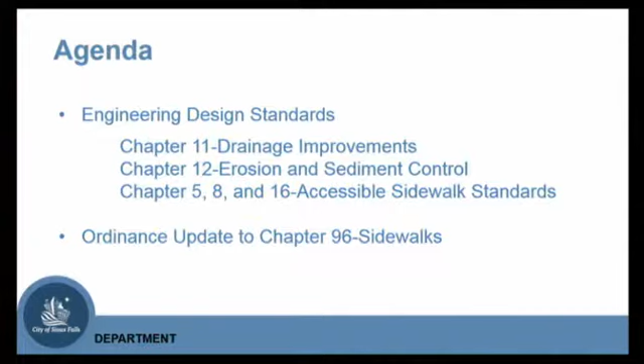I'm here today to give you an overview of our proposed changes to our engineering design standards, as well as a change to Chapter 96 of City Ordinance related to sidewalks. I want to introduce a few people: Lance Weatherly, our principal drainage engineer, will talk about Chapters 11 and 12 design standard changes. For my part, when I discuss accessible sidewalk standards and ordinances, I have Wes Phillips, our principal street engineer, and Colleen Moran, our assistant city attorney, to help with any questions.

One of the first things is why we're here to talk about engineering design standards. By city ordinance, the city council has to approve any changes we want to make to our engineering design standards. So that's why we're here today.

With that, I'm going to turn it over to Lance Weatherly to go through a few slides on his proposed design standard changes. After he's done, if you have any questions, you can ask him, and then I'll move into my part of the presentation.

Good afternoon, committee members. It's January 10th, and we're here to talk about drainage. It's single-digit temperatures out, but we always take the opportunity to improve our design standards. We did have a record rain event on Christmas Day not too long ago, and the system functioned fairly well, but we always look to improve, so that's why we're here today.

The first proposal is essentially a cleanup item. There were two locations in our design standards that had the same information, which could lead to potential conflicts. So in this proposed change to Chapter 11.8.9.5.e, we basically point to the other location. The picture shown is for reference, talking about a BMP, a stormwater treatment device, and the depth of water to treat.

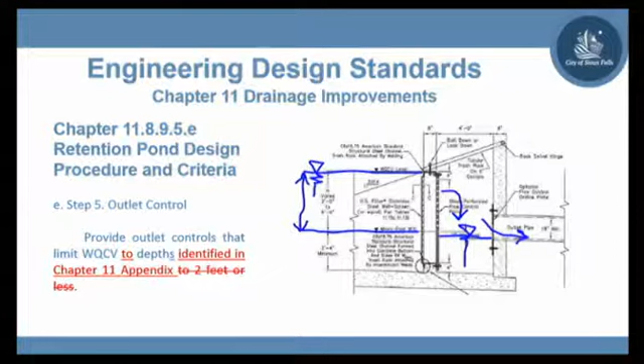Next, in Chapter 11, we're proposing to add design standard requirements for designing against erosion. The picture in the background shows a channel near Sertoma and Strabane Trail. Following the August 2015 rain event, there was some erosion there, as evident in the picture. To better clarify designs moving forward, we're proposing to input standard design requirements for certain channel designs to be better protected against erosion. This will maintain the channel's integrity and prevent sediment from polluting downstream, improving water quality.

The third proposal is related to the previous one. It's in Chapter 12, our erosion and sediment control, and relates to the size of rocks needed. Over time, we've noticed some smaller rocks, Class A, averaging about 12 inches depth, require more maintenance to go back and add more rocks. So we're proposing that designers can use that smaller rock size if accepted by the city engineer's office upon review. Otherwise, we're pushing them toward a larger rock to improve erosion control for outlet protection of that pipe.

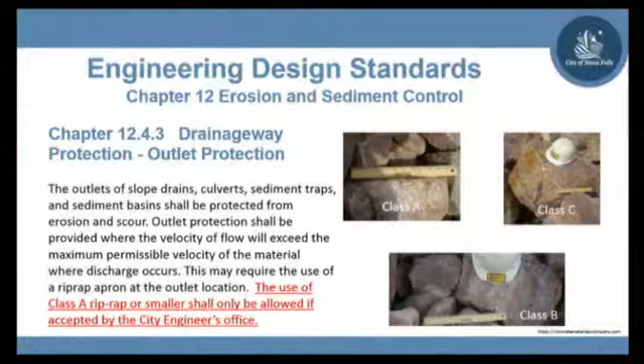Can you hear me okay? Yes. Are we talking about private access ways or public? These design standards would apply to both public and private. Well, I see the example you gave us over by Sertoma there. That was the city's taking care of that, right? That is a city drainage way, yes. So give me an example of a time when a private person would be handling waterways.

Most of these larger drainage ways, the city generally takes dedication of. An example of a private drainage way would be in a development where a developer doesn't want to give up control over that drainage way. One location out in Cherry Lake Reserve has a few spots they want to maintain themselves within their HOA. So this design requirement would apply to both public and private locations.

So right now, is the size of rock you can use being mandated on these things, or are you saying moving forward you're going to mandate it yourselves? It is right now. We are planning to improve that design requirement now.

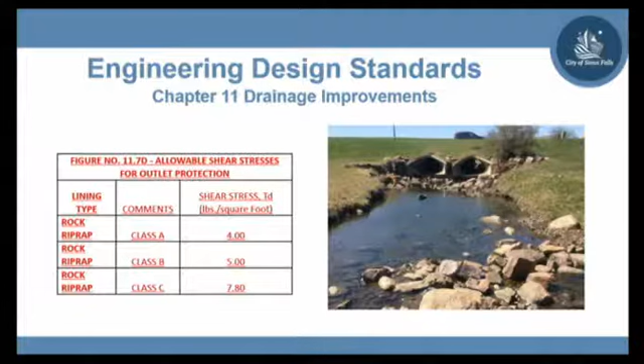Any other questions? Councilor Stehly? So this isn't going to be any added cost by requiring bigger rocks - it's just a housekeeping issue? Bigger rocks tend to cost a small amount more. It's a very small incremental cost, but if we're talking about a semi-truckload of riprap, we're probably talking on the order of $40 to $50 of potential additional cost.

Okay, thanks. Just a follow-up question - is it safe to assume there could be a savings in the long run, because if you're replacing riprap that's been washed downstream, you're just repeating the work? Thanks for bringing that up, Councilor. Yes, there would likely be a benefit with potentially less maintenance required.

Okay, seeing no further questions on this section, we're ready to proceed to the next. Thank you very much, good job. Thank you.

So, accessible sidewalks - a little background here. Everything we're doing is building on the Americans with Disabilities Act, which was passed in 1990 at the federal level. New construction and alterations in the public right-of-way must comply with the federal requirements, and the city is responsible for ensuring those requirements are met within the right-of-way we manage. So what we're doing today is making sure we're staying current with the most current federal requirements out there.

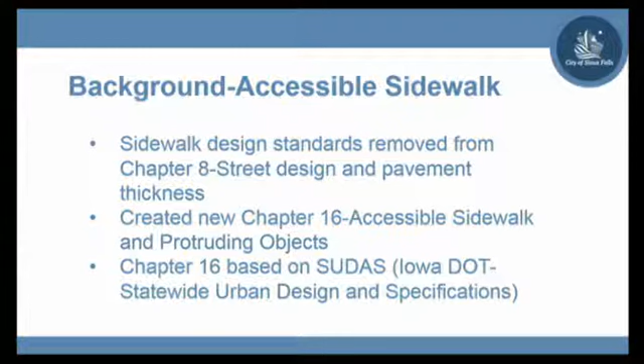It's the Iowa Statewide Urban Design and Specification Manual. This is a manual that the Iowa DOT, in partnership with a good majority of the communities in Iowa, uses as their basis of design. Rather than reinvent the wheel, we decided to use a document that's already been well vetted, so the majority of our document mimics the SUDAS document—it's just been tailored to Sioux Falls specific needs.

From an overall standpoint, this PROWAG document, this federal document, is about 112 pages long. What SUDAS and what we've done is put it into a more user-friendly document—just a little over 20 pages—trying to take federal bureaucracy and consolidate it into something usable.

Again, the vast majority of this is just formalizing our current standards and practices—putting into writing how we've been doing business. There are some new sections I'm going to point out as we move through here, or some things that are a little different than how we've done business.

But a lot of this goes back to the Americans with Disabilities Act of 1990, which is 10, 20, 25, darn near 30 years ago. When you start talking about landing areas and ramp slopes, those are all requirements that have been around for a long number of years—we're not just making up new regulations for that.

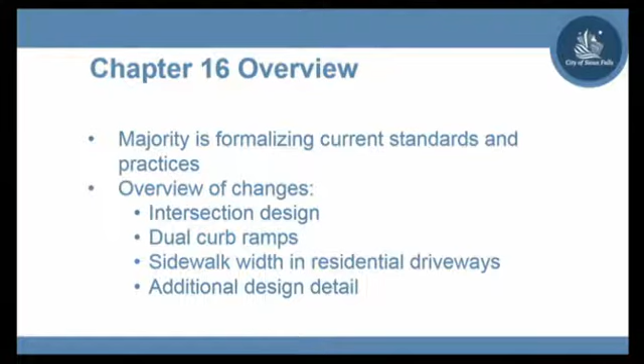Some of the things that are a little different from how we've been doing business: intersection design and how we're looking at that, dual curb ramps instead of single curb ramps, and sidewalk width in residential driveways, plus some additional design detail we need.

So just an overview of a typical design—a lot of what we're going to talk about is curb ramp design. That's really a foundational component of accessible sidewalks, making sure we have curb ramps that are accessible both for the mobility impaired individual as well as the visually impaired person.

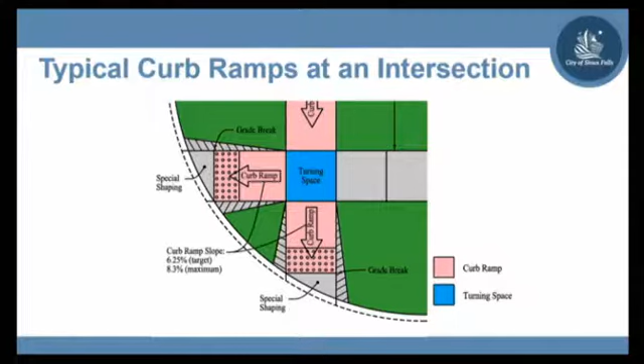One thing that PROWAG does require, though, that we're moving toward is dual ramp design. The previous slide as well as this slide show two curb ramps—one parallel with the sidewalk direction. Previously, curb ramp design had people get to that landing area and then go out into the middle of the intersection. We want to move toward dual ramps because it's less movement for the mobility impaired person.

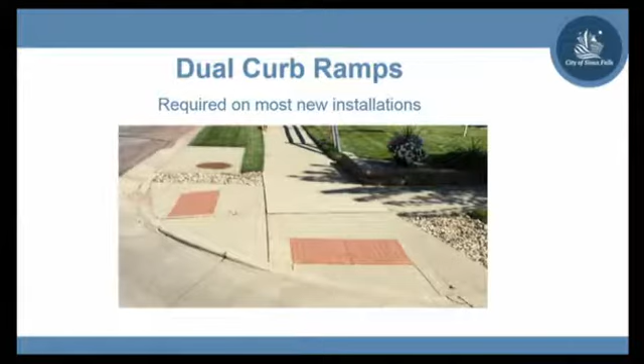They don't have to come to this landing area, go to the middle of the street, and then turn back to get lined up. That way we're basically going straight across. So in general, we're moving toward dual ramps. There are exceptions where on retrofits single ramps may be needed, or at some of our large intersections it's just tough to put dual ramps in there, but foundationally, we're moving toward dual ramps.

Another thing is the intersection design. We've always done a good job meeting ADA, getting people up to the street, but the new PROWAG requirements put a lot more emphasis on making sure we're factoring in our disabled community as they're crossing the street. So now there are requirements shown in the blue shaded areas on the slide. We have to make sure we're meeting certain cross slopes so the street isn't too steep as they're going across it. If it's too steep, it naturally tends to pull someone in a wheelchair to one side or the other. Depending on the type of street, there are different maximums. In general, our current street design guidelines comply with this, with just a few little tweaks.

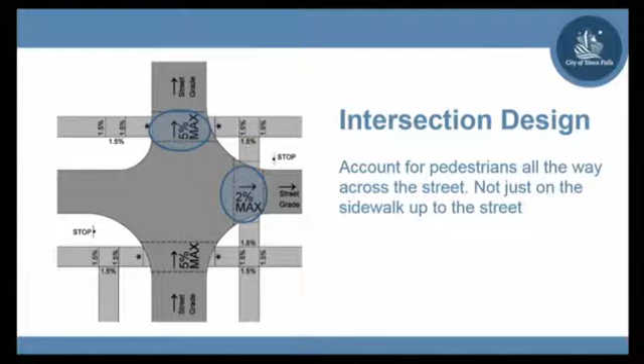This is one I want to emphasize. One of the requirements of PROWAG and the federal requirements out there is we have to have passing zones on the sidewalk if your sidewalk is less than 5 feet wide. So what that means is if two wheelchairs are meeting, the sidewalk has to be wide enough to allow them to pass. What the federal requirements say is you can have a 4-foot sidewalk, which is what we have on most of our residential streets, but when you do that, every 200 feet you have to have a passing zone.

So one of the things we worked through with the home builders was, one of the options we considered was should we just make all our sidewalks 5 feet wide? That would potentially increase cost, but then we'd be fully compliant everywhere. Residential sidewalks in general are 4 feet wide. If it's a collector type street with a little more volume, those are 5 feet wide, so they'd meet this requirement anyway. The majority of our arterial street sidewalks are 5 to 6 feet wide, so they all meet that. So really our discussion point here is on the local residential streets where our sidewalk is 4 feet.

So there are three options here. Again, one, we could have gone to 5-foot sidewalks, which wasn't received very favorably by the Home Builders Association. The other options were to actually build these passing zones like the illustration shows - every 200 feet, widen your sidewalk out to 5 feet for 5 feet in length, and that would meet it. Or, the standard we settled on, make your sidewalk through your driveway 5 feet wide. We typically have driveways less than 200 feet, and if your sidewalk through that driveway is 5 feet wide, with a certain slope it has to meet, we'd be in compliance. So that was the direction we moved toward.

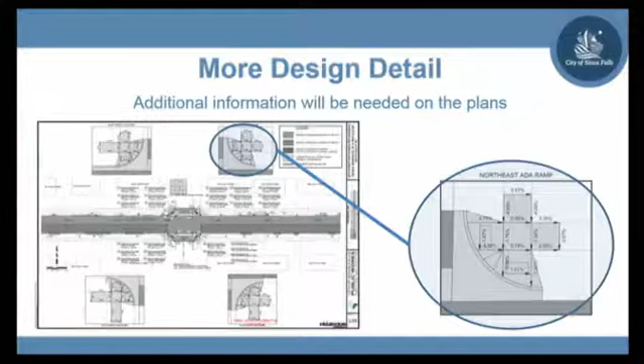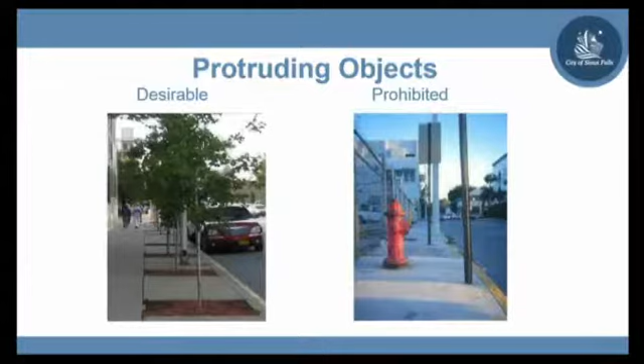The other thing that we're proposing is updates to Chapter 96, our sidewalk ordinance. I can kind of summarize that in 3 different areas.

First of all, clarify the inspection requirements. Now, to meet our obligation of making sure that sidewalks installed in the right-of-way meet federal guidelines, we have to inspect all the sidewalks that are installed, specifically with new homes. So previously, if a homeowner, when they're building a house, installed the sidewalk on their street frontage, we had not been doing those inspections. We now have to start doing those inspections to make sure those sidewalks meet the guidelines.

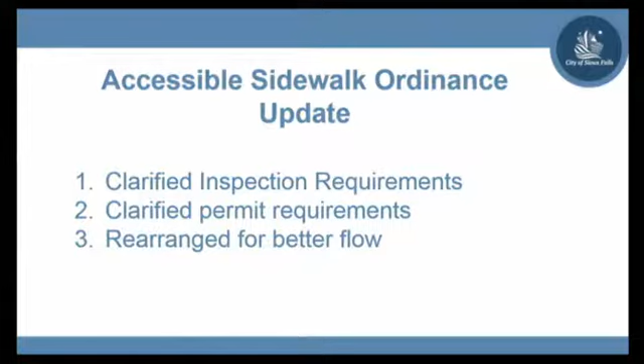In this case, 2% cross slope. That's one of the foundational elements of a sidewalk, meaning the slope can't exceed 2% cross slope. If it's too steep, naturally a disabled person can't navigate that very well. That's a foundational element of the Americans with Disabilities Act, so we're just going out there making sure they comply with it. It's a fairly strict standard, but it's something we have to enforce.

The other thing is clarified permit requirements. The way the existing ordinance is written, it basically says anybody doing sidewalk or driveways in the public right-of-way has to get a sidewalk or driveway permit from the city engineer's office. Well, the vast majority of our sidewalks and driveways in the city are installed as part of a building permit, and that wasn't clarified there. So what we've done is said, if you pull a building permit, you don't have to get a separate engineering sidewalk and driveway permit—that's included as part of the building permit. It's more or less a clarification of how we've been doing business.

And then we rearranged it for better flow—the flow of the permits, who's in charge, the specifications—we're just moving the sections around for better flow there.

So with that, I'd love to entertain any questions. Okay, great. Thank you, Shannon. Questions? Councilor Neitzert.

We're not changing the fee. Wes? $15? I believe it's $15, but I'd like to clarify that.

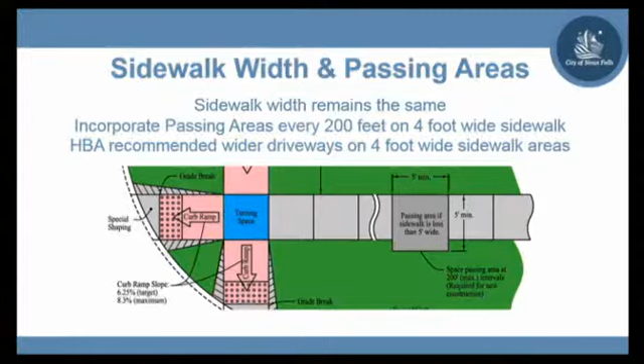Just a few more for round two. When do the federal rules expect these to be triggered? Is it on new construction? Is it on certain rehabs? Is it complaint basis? Do they expect us to go through the city and get it all fixed? What is the trigger point that they require it?

Actually, that answers two questions with your original question. I think I might go back to something Councilor Stehly was asking. Can you go to page 16.5 of the proposed design standards? Chapter 16, page 16.5.

I'm having Lance pull it up here too for the screen. Basically 16.5 talks about applicability. There's new construction and there's alterations. So new construction, basically we're saying within the scope of the project shall be made accessible, except when it's demonstrated that it's structurally impractical. Structurally impractical means you've got a huge hill or something like that, where you can't meet certain grades.

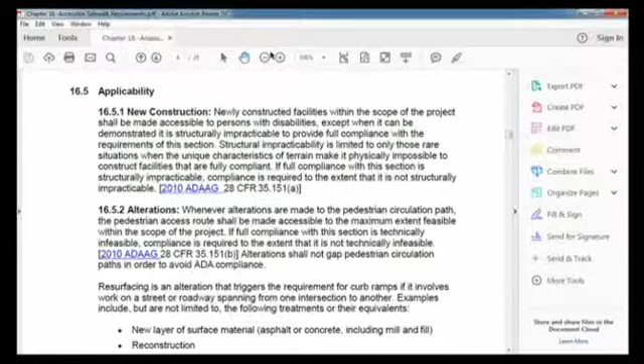Subdivisions with no sidewalk - there are places in town that don't have any sidewalk. Is that something that's just waiting for somebody to make an ADA complaint and then we'd have to put sidewalk in, or?

I'll have Wes answer that. I guess in general, where you have sidewalk, it's required to be accessible for all. Where there isn't sidewalk, there aren't necessarily ADA requirements to have one, but we do have a process that you've all been involved in where if we get complaints that there's no sidewalk, we bring that to the city council, then to a hearing to determine if sidewalk should or should not be required. So that's kind of an independent issue, related but a little bit separate from what we're talking about today.

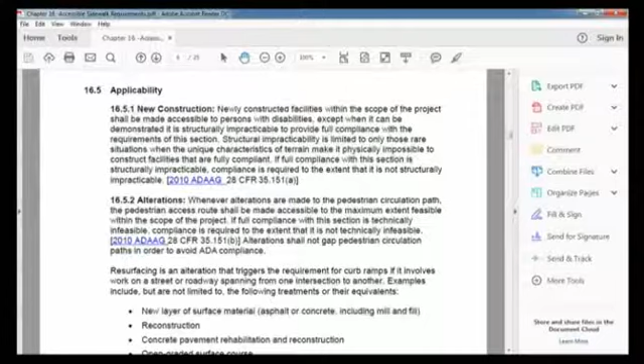My last question has to do with obstructions, existing obstructions on the sidewalk. I'll give you an example - I don't remember the exact measurements, but when I was first elected to the council, somebody called me with concerns about obstructions on Benson Road, on the south side when walking between Cliff Avenue and I-229. There are existing light poles and other things, and the sidewalk didn't go around them, it just went through it. I don't remember exactly - you'd have to take a tape measure out.

What about those areas where you might have, say, a light pole and maybe it's only 48 inches from it? Do those have to go back and be rectified, or? In general, the primary goal will be to get that out of the sidewalk. However, that's not always feasible. So within the ADA, there's also minimums of sidewalk width that you need around an obstruction, and generally that's 4 feet, according to the ProWAG requirements.

And that specific case, I was involved in that a little bit, and we do meet the minimums at that point. The previous minimums were actually 36 inches around an object, and I believe we meet both of those requirements out on Benson. Yeah, you may. I think it was close.

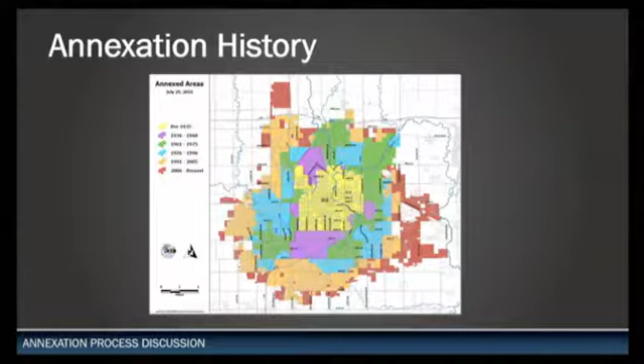Now we're at about 78 square miles, and we're expecting that we'll have even more voluntary annexations in 2017. But when you look at this particular map, it would appear that up until the 2000s, everything was perfectly squared off and all those gaps were filled with annexation. And that's somewhat true, but what we've found in more recent years is that as these city limits have expanded, the parcels that have been annexed are much smaller than they have been historically. And I think that's been driven by the cost of development, the type of development. We're not seeing these large parcels brought in by developers at one time like we did back in earlier decades.

So we've had annexation programs in place for some time, and back in 2014, we began talking about a more aggressive way of defining how annexations should be led by the city, where there is not necessarily voluntary action by the property owners. So just in general, obviously annexation is a way of expanding our municipal boundaries. City planning, along with engineering and other departments, reviews all types of annexations before they're brought to the city council, and that's governed by not only local ordinances but also by South Dakota law.

Typically, there's one major way that property has been annexed, and that's by voluntary petitions. 75% of the valuation of the property and of the registered voters has to be signatures on that annexation petition. Those are reviewed by staff with a recommendation to come to the city council. We typically look at if it's in a service area, and if in a reasonable amount of time we can provide what types of utilities or other infrastructure is going to be required for development of that property.

There's also a process where the city can initiate annexations. We started one of those and we've pulled back on it to try to reset where these future annexation processes should be going. We've also brought a few pre-annexation agreements to the council, which is kind of that intermediate step that can present a timeline with future conditions that would trigger annexation by the property owners, giving both the city and the property owners a better idea of when those annexation timelines will be implemented and what financial impact that would have to both parties.

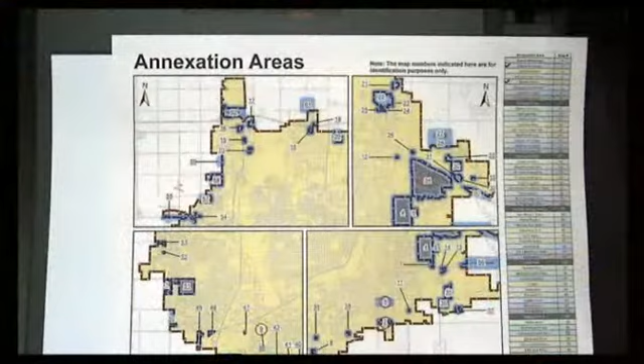This is the list of annexation areas we put together by name and by location. As you can see, some are completely surrounded by city limits and some are more on the edge. Would you say a number of them are residences, or just a few? I'm trying to get an idea.

I would say over half of them are existing residential development areas. Okay, and it sounds like in one section here, it's almost like you've got your own lawless island on some of these.

I mean, you've got everything from snow removal being hard to enforce, to discharging of weapons. Has there actually been a lot of issues with that, where somebody might be breaking an ordinance and we can't do anything about it? It hasn't been a large issue for us recently, but it potentially could be, particularly when development surrounds somebody that's not in the city. You don't want those kinds of complaints coming to us.

I don't know that we have the exact metric of how many of these are residential versus non-residential, but a large number are existing residential development on those large lots. Okay, thank you.

If I could have a quick follow-up since we're on that topic: one of the implications of unannexed land includes burning trash, farm fires, and watering restrictions. Now if they're hooked up to city water, would they be required to follow watering restrictions even if unannexed? I don't believe they would be, but their water bill would be pretty high, which they'd have to pay.

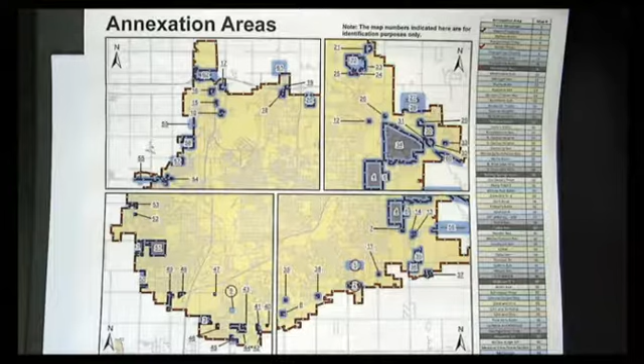But I was just curious, if you do those, you kind of start creating more pockets again, rather than doing contiguous. I'll go back to that other example I showed you, that when a petition comes in for voluntary annexation and there's existing property owners that are not ready to be annexed yet, that's a big way that we see these pockets have evolved over the years.

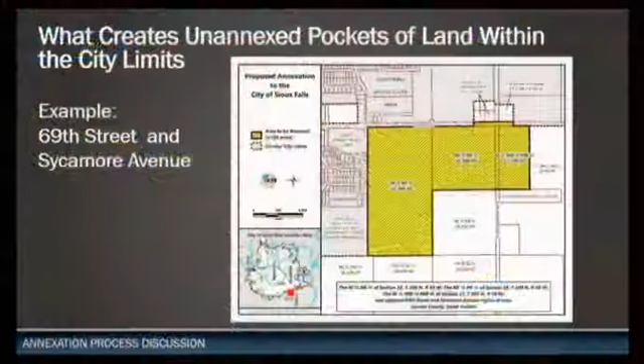I know interest rate is set in ordinance, but something else that's come up as a discussion point is maybe in this particular case there should be a different approach, because I hear from people who have $150,000 and $200,000 homes that are looking at $60,000 assessments, just throwing out round numbers. That's huge. Maybe there should be 0% interest in certain cases, because of course we're going to lose a little bit of money on that, but it would seem that as a city, it's going to hurt a lot less on our side than it would on theirs. That could put somebody out of a home, I would think.

The city council did approve an ordinance amendment that allows us to extend the annexation, allows the city council to extend the assessment process out longer, but there's still an interest rate to that.

Yeah, I'm sorry, can I just? I'm sorry, I want to move on. Councilor Stehly, sorry, and then we can come back.

Councilor Neitzert. Yep. Well, first of all, I want to make a statement that I think we have to be very careful about not making these property owners into bad guys. I know the statement has been made that they're not contributing to our society, but many of these people work in Sioux Falls, they're paying sales tax, and that's a big chunk of what we use to keep our city going. So in essence, they're contributing to something that they're not getting a benefit from if we're talking about just general sales tax, capital improvements and such.

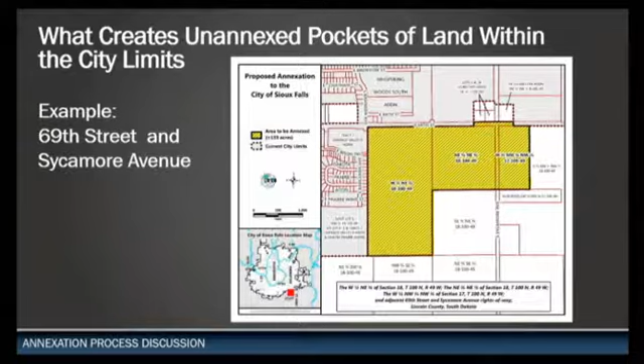But back to what Councilor Neitzert said about the interest rate. Our city's talking about getting great interest rates on the money that we're borrowing, 1.5%. I don't think it's fair to turn around and charge a homeowner 3% on this forced annexation infrastructure that we're going to be doing. So I would say let's find a way of making that very affordable for them. We shouldn't be making money on the backs of these people, in my opinion.

And someone even mentioned, why not look at having some second penny money, maybe do a split 50-50 on this thing.

That would make it more palatable to any of these people. Just throwing that out. I'm not aware of the pockets, and you need to educate us to know if there's a residential area totally surrounding a residence that's not annexed. That's different than having a whole area outside of town that hasn't been developed yet.

I want to ask a question about the area east of Highway 11. That whole area, what's it called over there? Split Rock Heights. Are we going to be annexing them sometime? It's on our map, but we haven't put a timeline together yet. Okay, so that's going to be interesting.

We start rolling towards them, and if we approach them the same way we did the Metzger property, I think we would be hearing lots of pushback on that. So I don't know that one size is going to fit all on this thing. But it's a significant issue, as you are saying and as we're talking today.

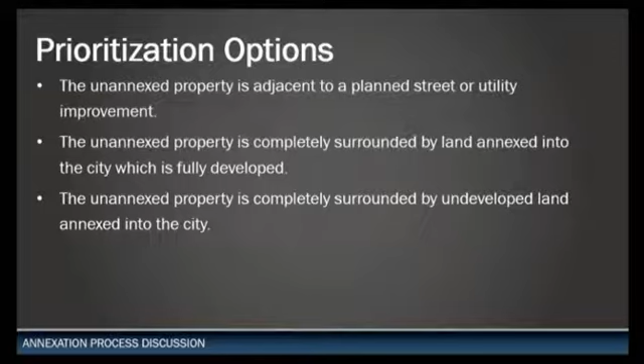But also, there's often times when annexations happen, some of these developments sit empty for 10 years. We saw in the instance of Canterbury Heights that it sat because of many different circumstances, but that development sat slow for quite some time and has now started to see more development. So just because it's annexed and then rezoned, does that mean it should automatically be triggered? I don't know if that's the right answer. Just throwing some hypotheticals out there—even if you're surrounded, it might not be that time. Is it a priority for houses? Is it a priority for commercial? I think those are things we should continue the conversation on, of course, and this is just the start of that, but communication is the first place to start. Thank you, that's all I have.

Thank you, Councilor Erickson. Any other councilors?